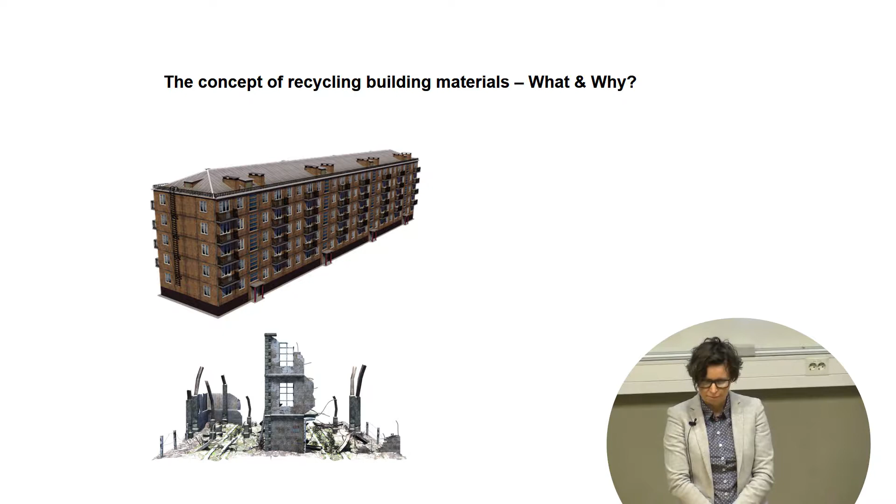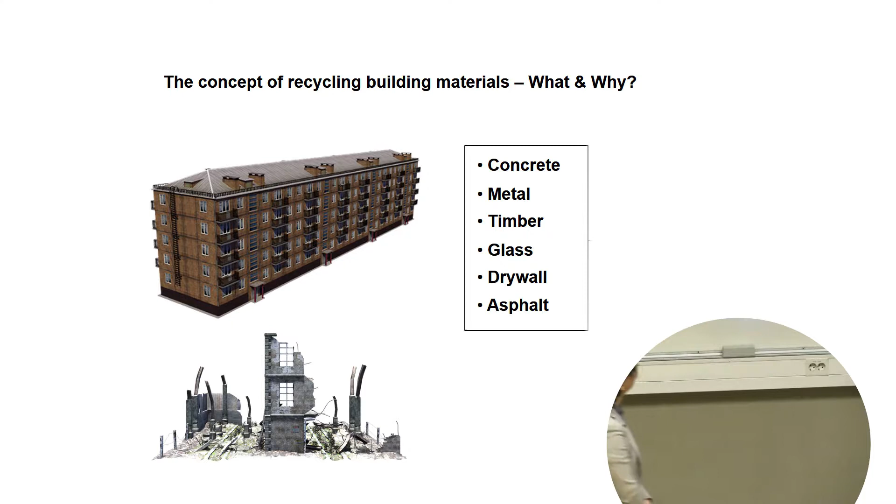And what do you think? What is the most common ingredient during this kind of demolition? A question to the audience. What do you think? What is the most common component? Concrete, exactly, concrete. We have a lot of concrete, we have metal, we have timber, glass, drywall, asphalt, and these 6 ingredients form approximately 70 to 95% of the whole waste.

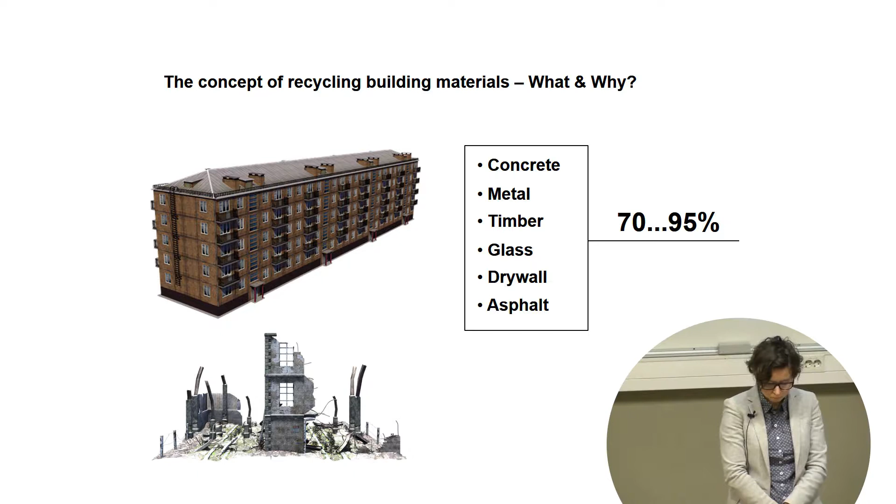For example, let's take concrete, one of the most, actually the most used building material in the world. Approximately 4 billion cubic meters per year, approximately. And all these components come from earth.

For example, water, well, cement, actually you have to make cement before you can use it. You have to mine limestone, clay, gypsum, and coarse aggregate, for example, gravel, fine aggregate, for example, sand, and it forms mostly 70 till 80% of the concrete.

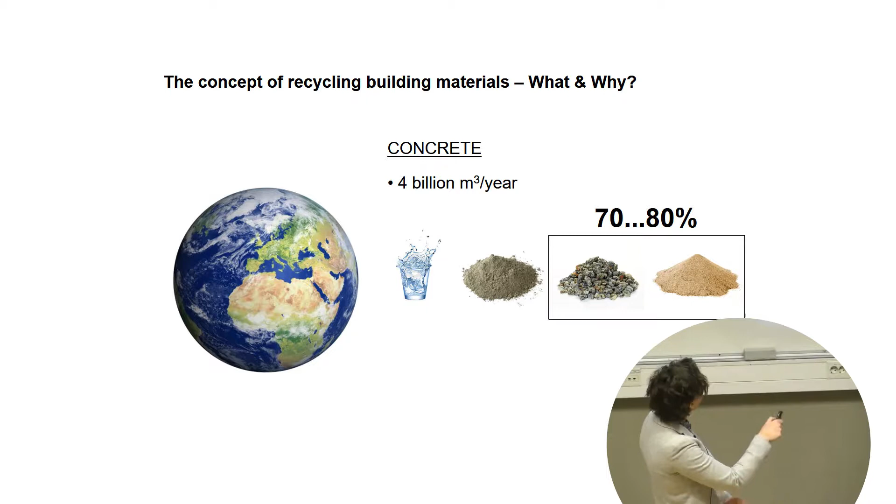And this is the point where we have to think about recycling, because aggregates are one of the components that we can recycle. We can use it again, actually.

And every time we produce concrete, every time we take a bite from earth, actually. For example, if you produce 1 cubic meter of concrete, you will have to mine approximately 2 tons of aggregate. Remember that. And there is a chance for recycling aggregates, for example.

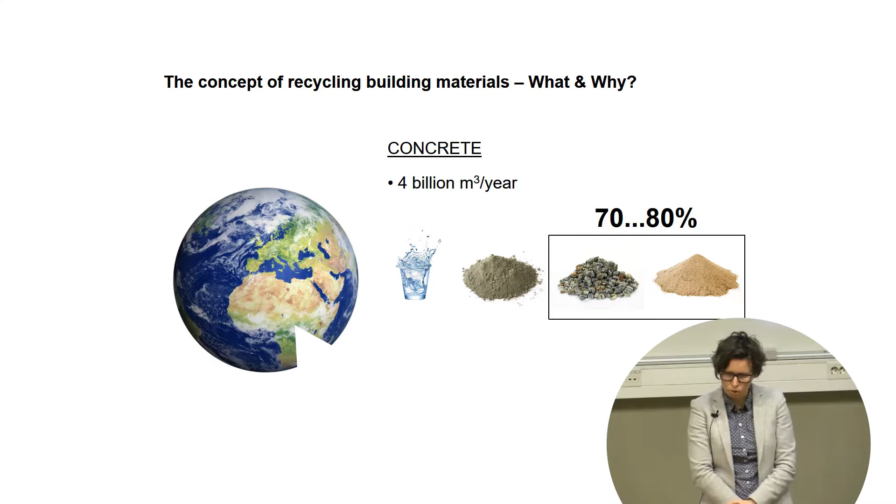The seriousness of this problem is presented here in the next graph. You can see during years, billions of tons of global resource consumption. And for example, construction minerals have a significant exponential increase compared to others. So there is a very important thing to think about: construction minerals. We cannot waste these materials because there will be a time where there isn't anything to mine, and it's quite a problem to build new buildings, actually.

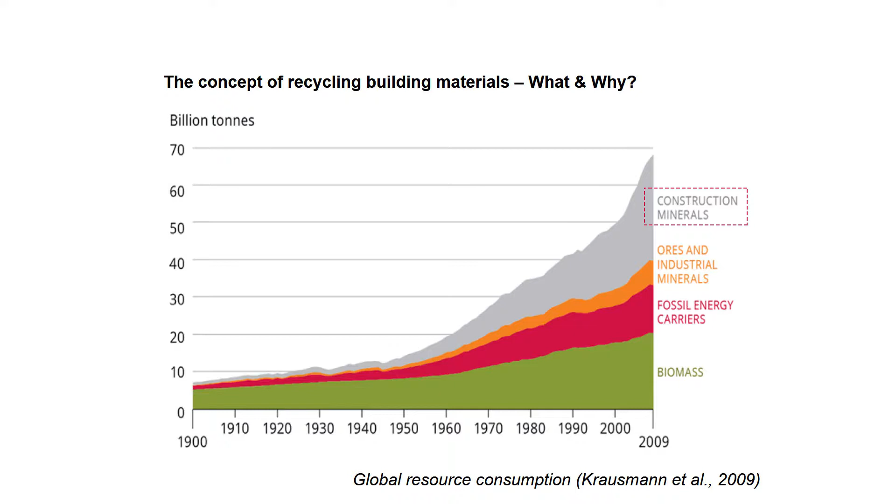If you look around in your country, for example in Tallinn, I think I have never seen so many cranes around. So there is a rapid construction boom, actually, at the moment. If you admit it or not, it's everywhere. Of course, most notable in rich countries, such as China, for example.

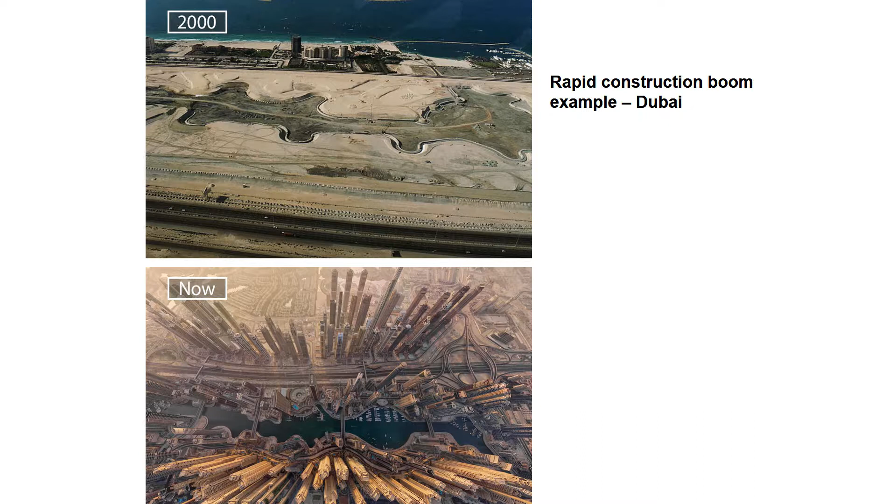And I have an example here, a rapid construction boom from Dubai. You can see in 2000 there is a sand field. A decade later, a skyscraper madness. And if there is a construction, there is always a demolition as well.

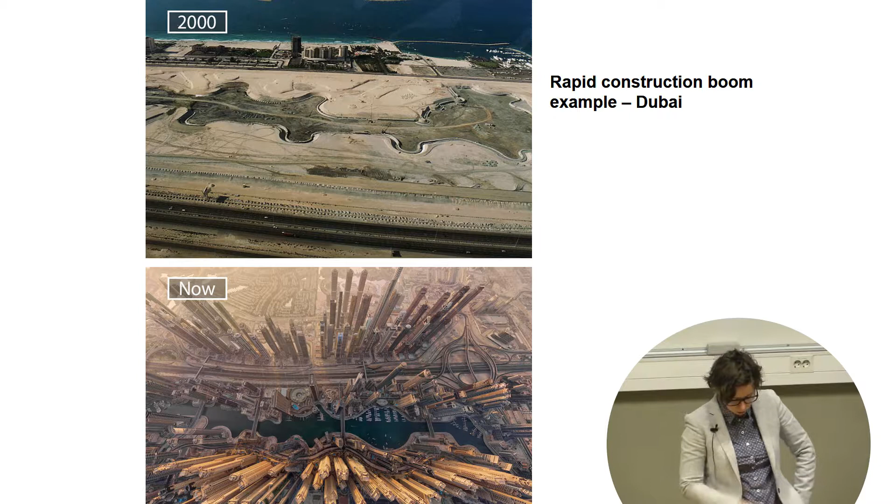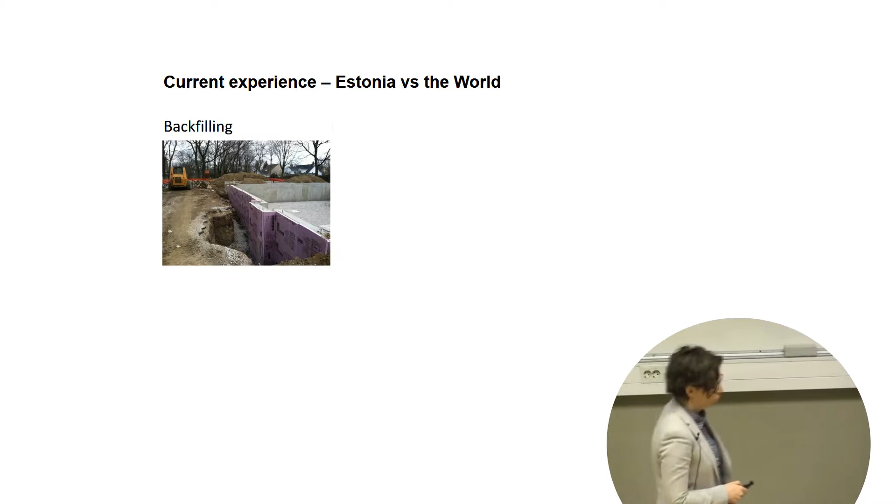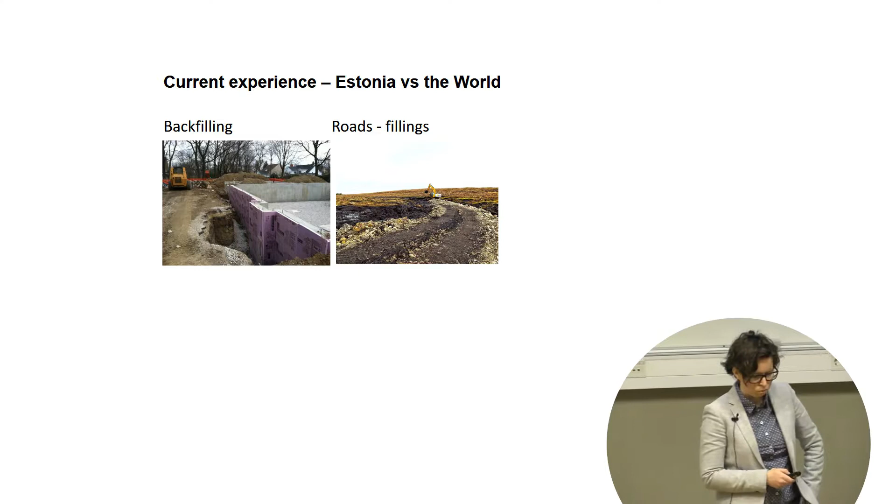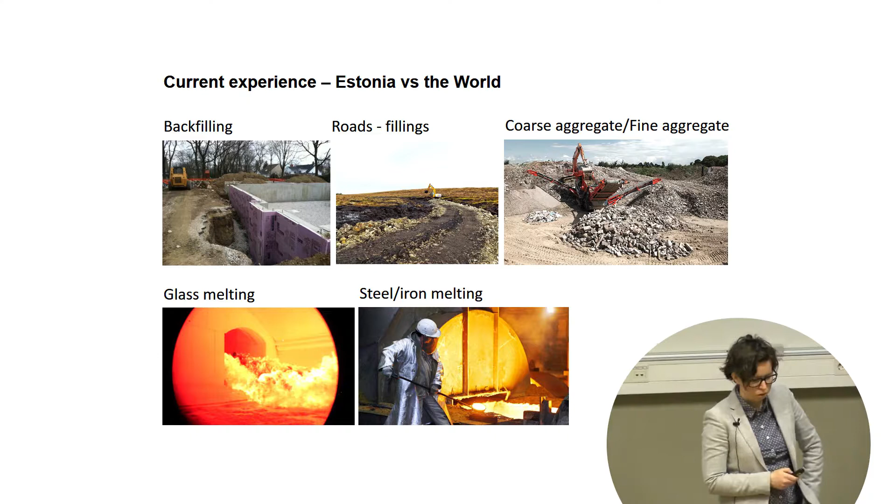Anyway, Estonia versus the world. What is the thing we do with recycled materials? Today, usually, we use it for backfilling. We use it in roads, also in construction roads, for fillings. We make coarse aggregate or fine aggregate. We melt glass, metal, and crush timber, and we use it a little bit here in Estonia as well.

As a member of the European Union, we have to take a look at the waste guidelines. The correct name is the Waste Framework Directive, which says that by 2020, a minimum of 70% of construction waste by weight must be recycled or reused. So this is a very ambitious target, actually.

I found research by Spanish scientists giving an overview of recycling rates of construction and demolition waste. The greenish colors are good rates, and the reddish colors are quite bad. You can see that Estonia, surprisingly, performs very well. But when I looked into details, I realized that what is excellent on paper isn't always excellent in real life.

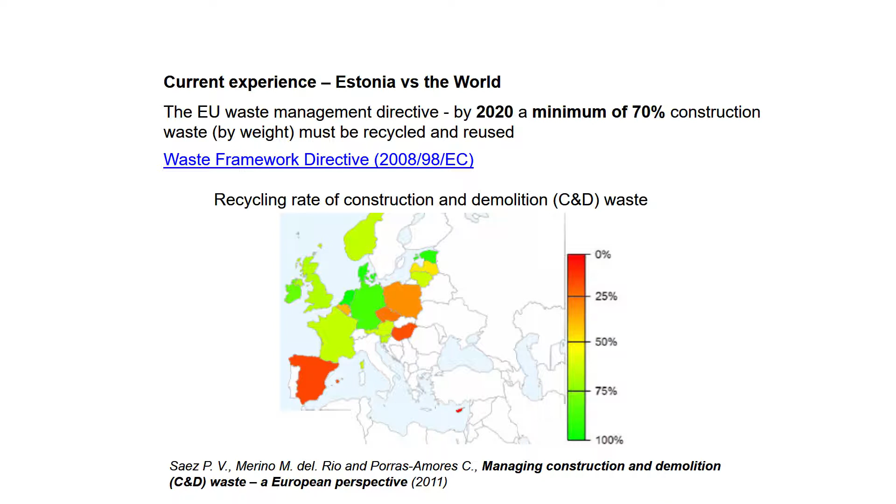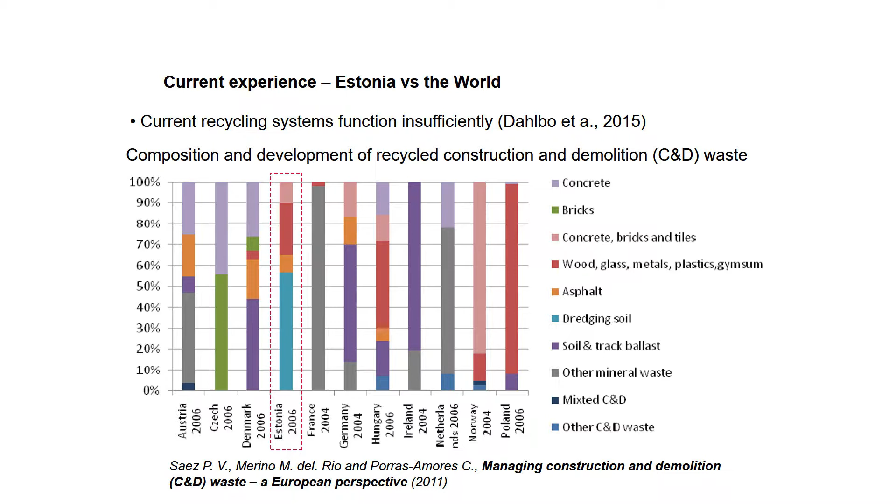When we compare, for example, us to Norway, we can see that they actually give proper ingredients: concrete, wood, brick, tile, and so on. Their rate here is very good. Anyway, other reports say that current recycling systems function insufficiently. That is quite true, and this is a real problem, actually.

I made some calculations. For example, let's take this Soviet-era building, a very regular building, 5 stories, 4 entrances. I made some simple calculations and got some results.

Concrete. Yes? Excuse me, can you translate dredging soil into Estonian?

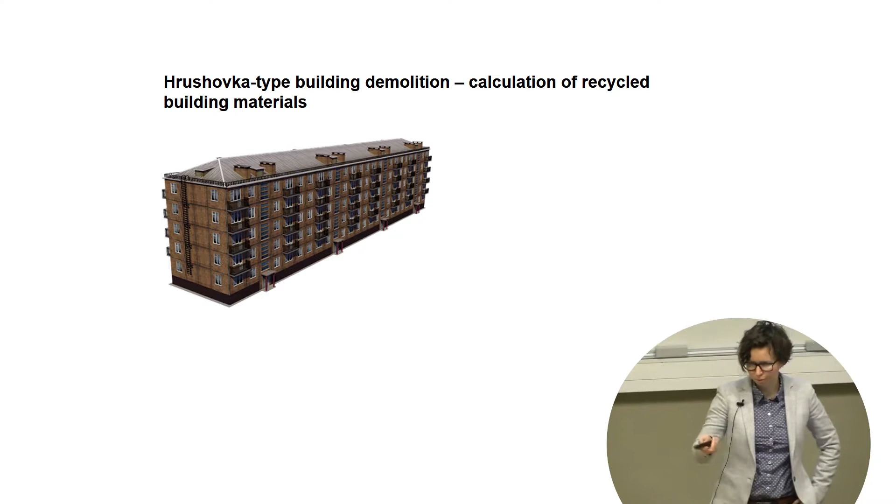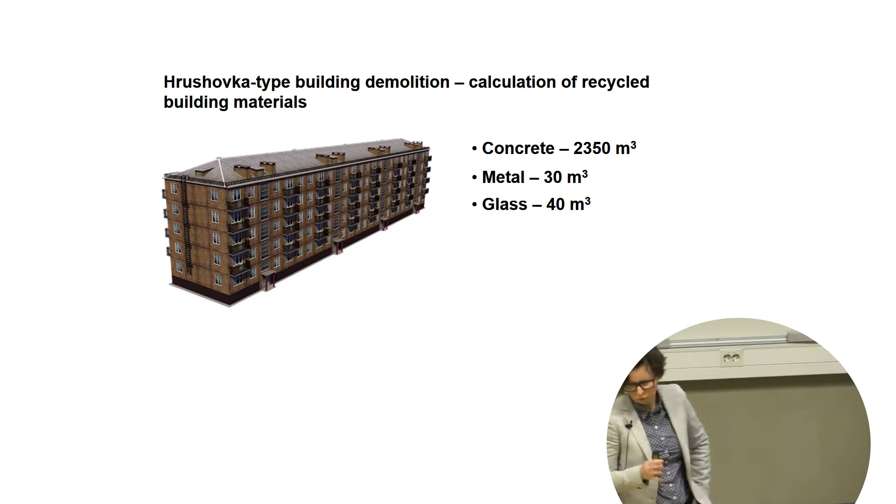Anyway, I will continue. For example, if we demolish this kind of building, we will get concrete, approximately 2,300 cubic meters. Metal and glass equally, 30-40 cubic meters. Timber, approximately 300 cubic meters. In the Soviet era, a lot of fiber was used for thermal insulation, so it is included here in timber. Other materials approximately 100 cubic meters, totaling nearly 3,000 cubic meters.

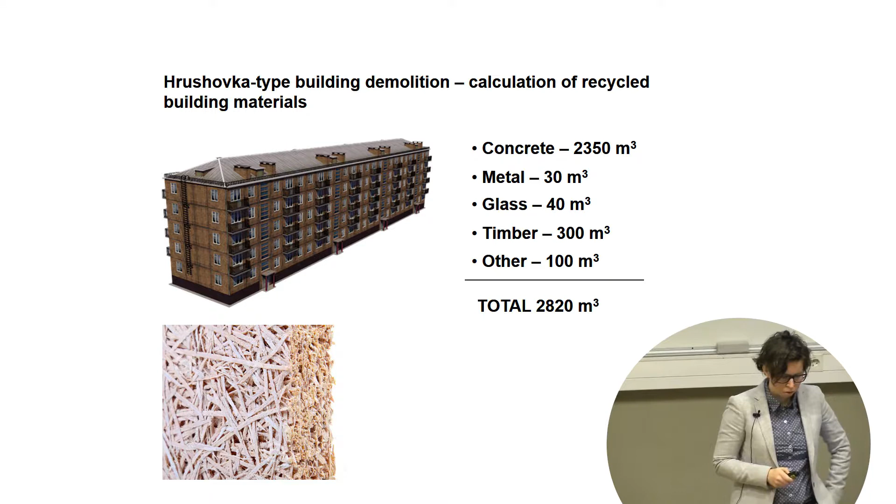So I took a look at another research paper and found an empirical model to calculate construction and demolition waste. What I received was that my calculations were quite similar. With approximately 80 dwellings/flats in this building, I got nearly 3,000 cubic meters of waste. So if there is going to be a decision to demolish a lot of these kinds of buildings, we must have a plan for what we are going to do with this waste and how we are going to use it.

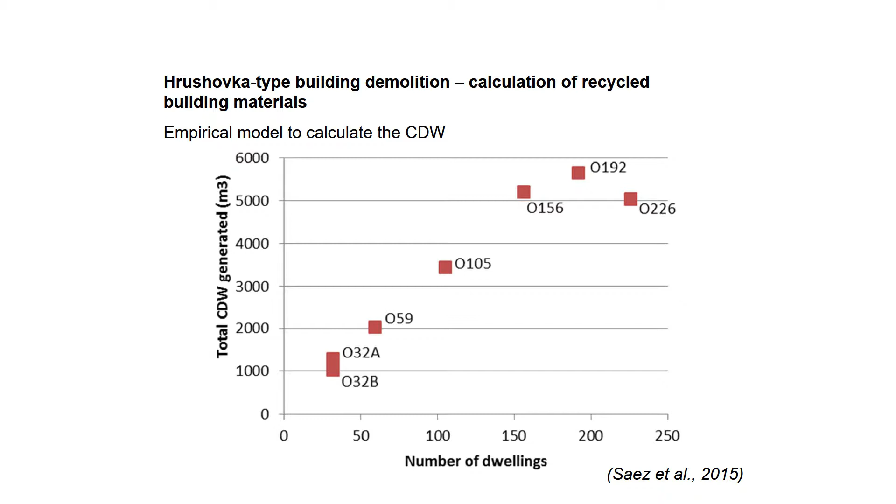Because according to what I have given you, it is quite reasonable to think that recycling building materials should be a reasonable step. Yes, it is, but there are some kinds of problems.

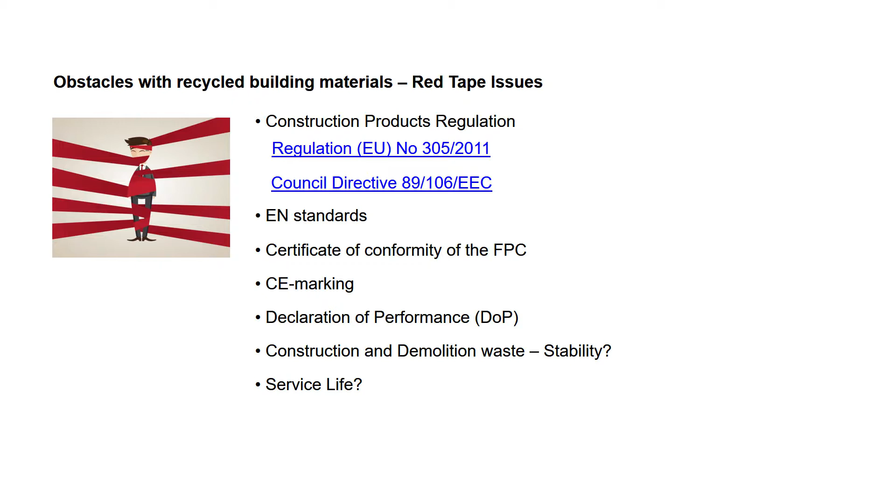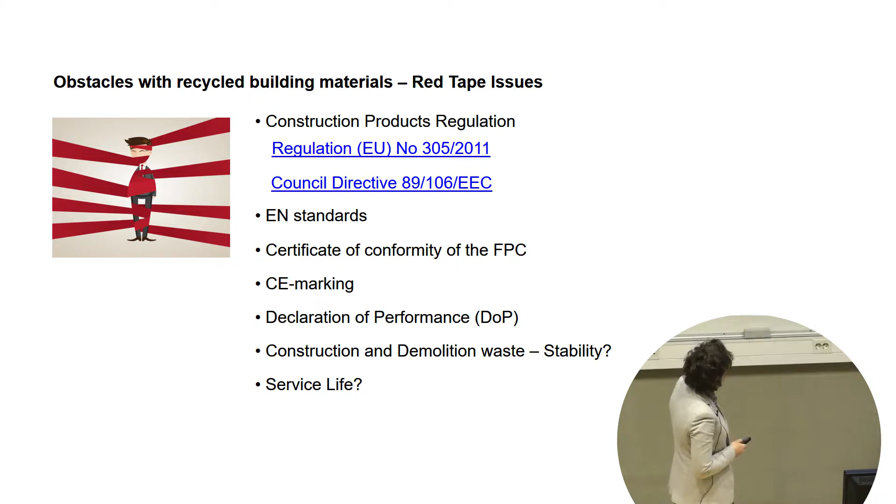Let's name it red tape issues, another word, bureaucracy. All construction building materials should be regulated, or must be regulated, by the Construction Product Regulation, formerly named the Construction Products Directive. So we have to follow European standards if we want to use recycled building materials. We have to give out certificates, CE markings, declaration of performance, and so on.

But if we use construction and demolition waste, the material is very variable, and the technical characteristics are very variable. What about stability? The question is, if I use a recycled material, will it provide the same service life as if I use a new material? That is the question.

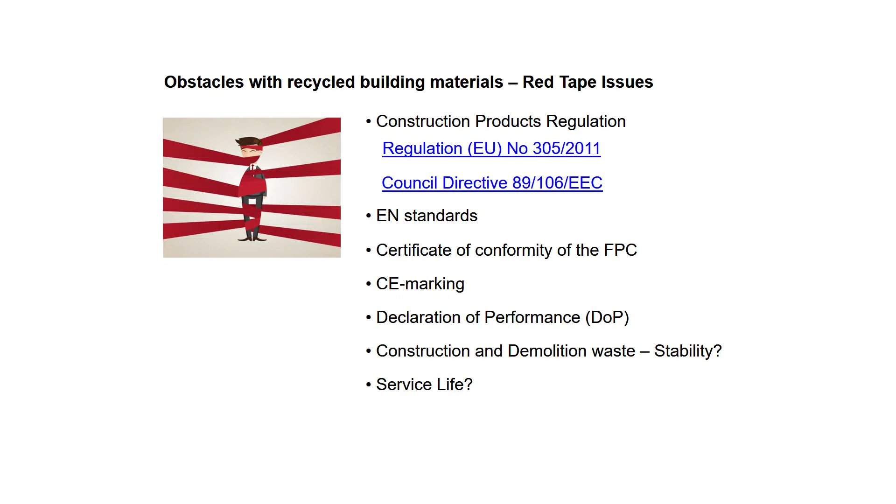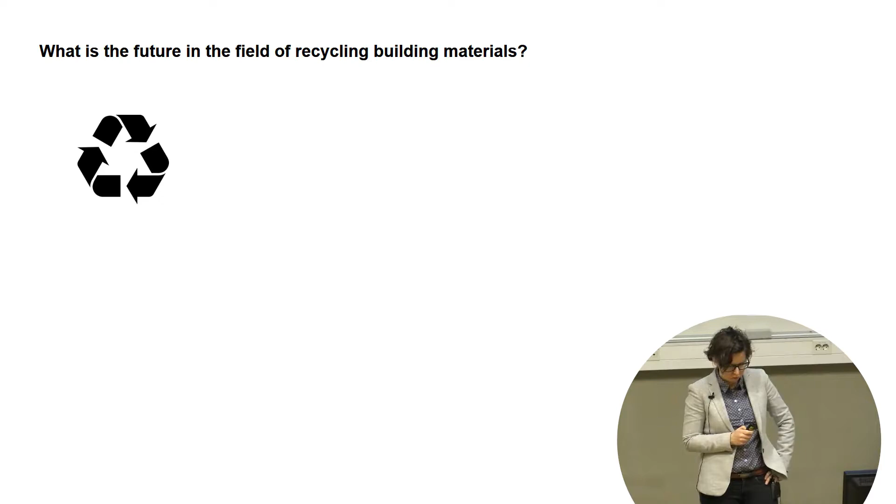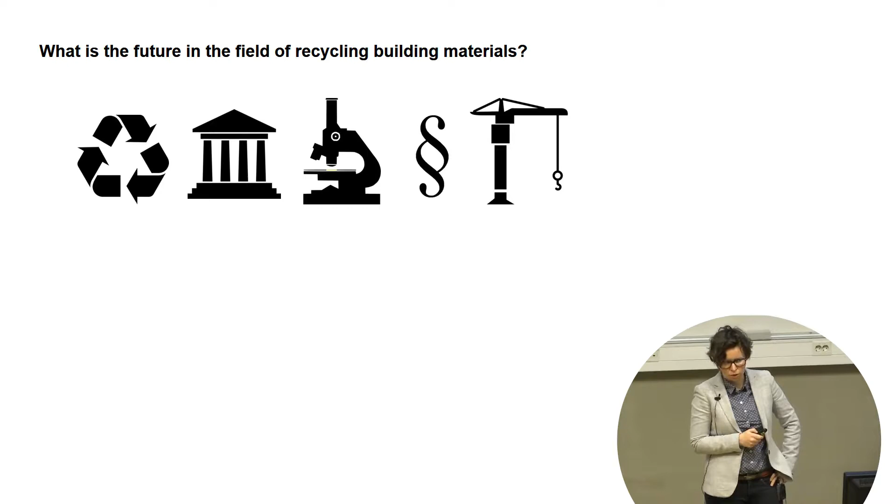What is the future in the field of recycling building materials? I think there is a very important part for government, because every government should actively participate in this area. They have to cooperate with scientific groups in that field to understand and develop national regulation for recycled building materials and how to reuse these kinds of materials in buildings.

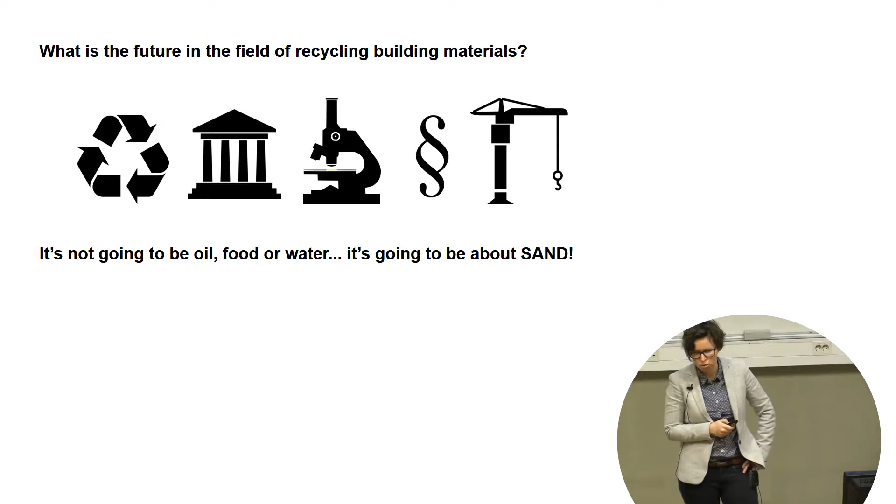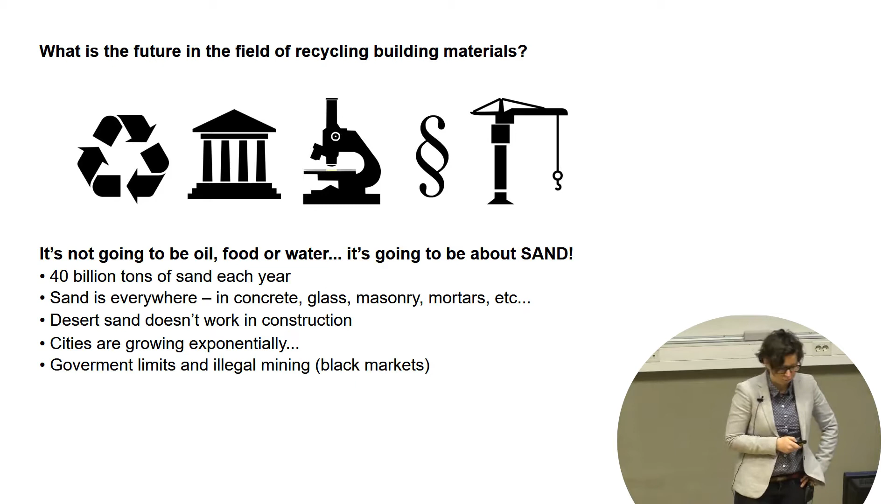Why, you ask? More and more I can see these kinds of headlines: it's not going to be oil, food or water, it's going to be about sand. It's going to be about a sand war, because we use approximately 40 billion tons of sand each year. It's everywhere: in concrete, glass, masonry blocks, mortars, even in your computer chips. Not every sand works; there are only very specific characteristics that we need in construction.

So cities are growing exponentially, you can see that. And there are countries where people are actually dying. There are black markets, people mining sand, and it's banned by government. So it's a real problem, and actually it's the global crisis you've probably never heard of. And it's the future, so recycling must be the answer.